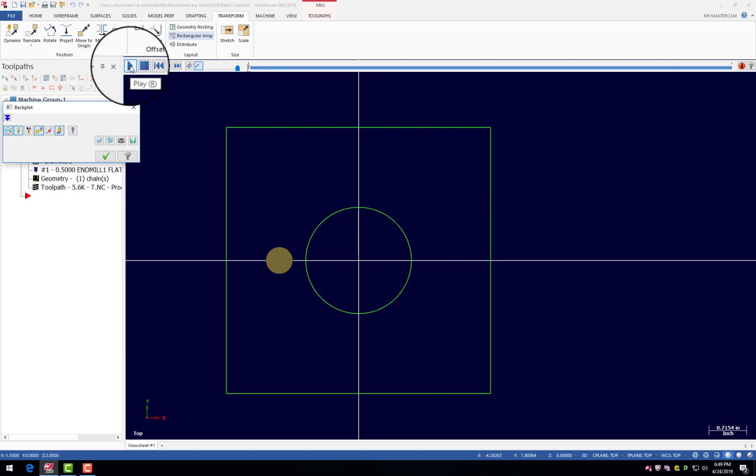Okay, so the focus of this video is going to be cutter comp options in Mastercam. All right, basically what I have programmed here, if we go to backplot and watch this run, is a straight lead in and then go around a 2-inch diameter circle, which will give us a 1-inch radius, which is nice and easy to see the cutter comp moves and what the software is kicking out for code.

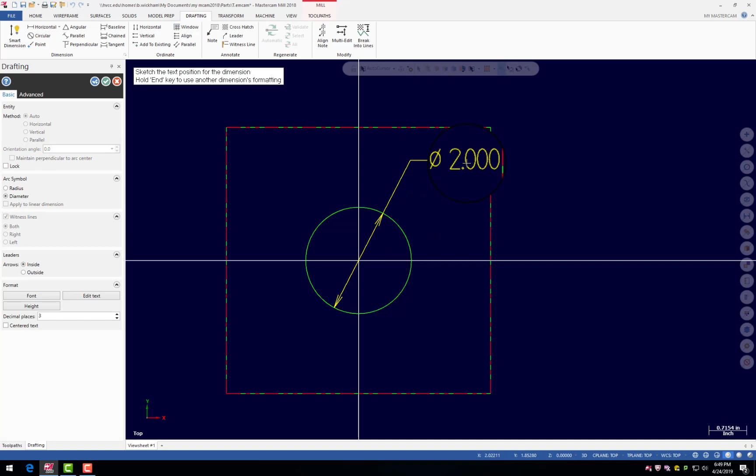Okay, so again, 2-inch diameter circle. I can go up in here into drafting and put this on there just for your reference. Okay, I have a simple contour, and again, we will watch that run again just to show you. Lead in, cut around, lead out. All right. This is not particularly an efficient tool path. I didn't change any speeds and feeds or anything like that. It's just a 1/2-inch cutter. The main goal of this is to show just the cutter comp options.

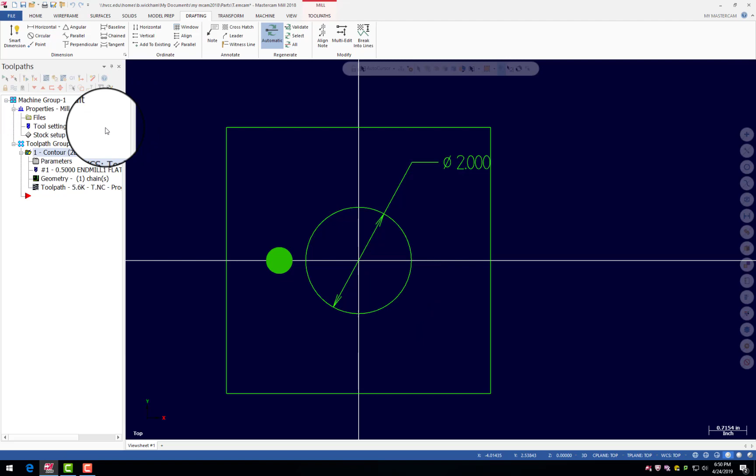Okay, we're going to select contour. In parameters, you will see under cut parameters the compensation type that I mentioned. This checkbox is very powerful. It changes your code somewhat drastically. All right, we will take a look at the different options: computer, control, and wear. We will also look at off. I will skip reverse wear for now because I find it not very useful. I have not used it a lot. All right, have not really had a reason to, so we'll focus on these 4 and skip reverse wear.

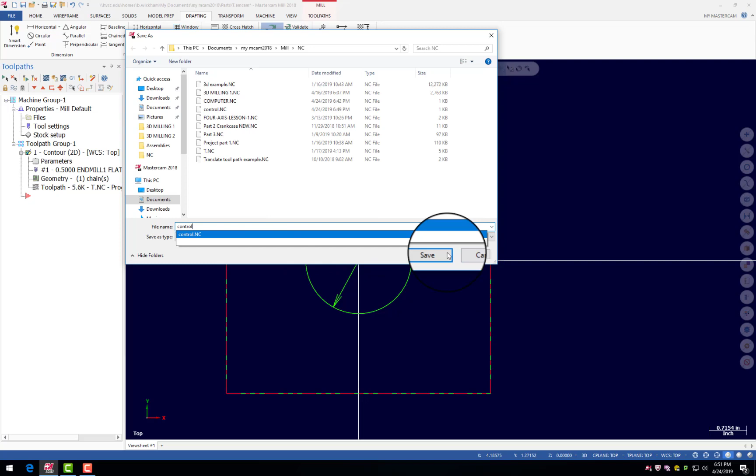Let's go to control first. We'll hit green check, and we will post this code. I'm going to label it as control and overwrite the existing example. And we'll take a look at what the code actually looks like. And I will save each one of these and show you at the end. Again, every one of these programs is going to be the same for Mastercam. The only thing I'm changing is the compensation type, and we are looking at the resulting code.

Okay, so we take a look. Check tool 1, work offset's the same. All right, look at line 170. And this is a big one. Okay, cutter comp to the left because we are going clockwise around the circle. D1 going to X minus 1.0. So there's the 1-inch radius. Okay, lead in with the modal command here. Clockwise all the way around. Look at your X, Y, I, and J's. See a bunch of 1 inches.

Cutter comp cancel when you lead off. Okay, Mastercam tends to do it efficiently, but if you are hand programming, it's very good practice, especially when learning, to lead on and lead off the same amount. Okay, so take a look.

This is control. What control needs from you is the diameter of the end mill in the controller, hence the control method. Okay, this program, if you do not put the diameter in the controller in the D1 area in your tool offsets, you're going to cut the radius of the tool on both sides undersize. Okay, because it's not compensating for the radius of the cutter. Hence, the control method. It requires a control input.

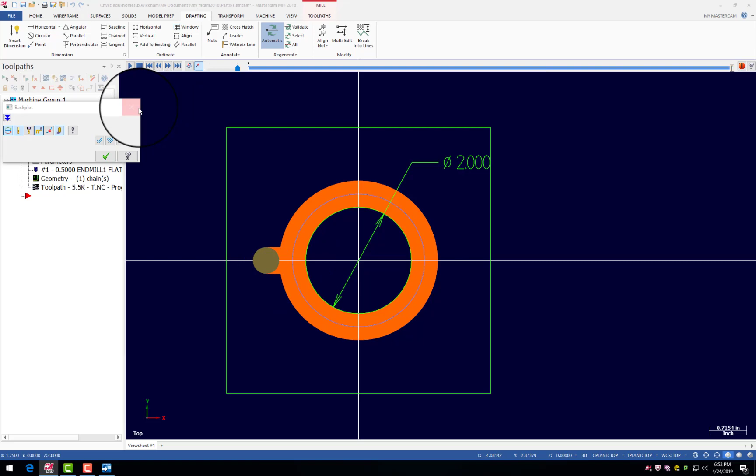Okay, let's minimize the screen. I will leave control.nc open so we can compare later in this video. Let's go back to parameters. Let's change to computer. Green check. Regenerate the operation. Let's look at it in backplot. Not much of a difference. Maybe a little bit more lead in, but nothing major. Okay, it's the same program. As far as Mastercam is concerned, the only thing I changed was the compensation type.

Now I will post this. I will save it as computer. And we will take a look at computer. Notice, okay, it is offsetting the radius of the cutter. Everything is increased by 1/4 of an inch.

Okay, so using computer, all of the cutter comp is not done with G41 or G42, and it has nothing to do with the actual controller. All of your tool offsetting is done in code. Hence, going to X minus 1 1/4, which since this is 1 inch, it's going right here numerically. Okay, there's no cutter comp in terms of G41 or G42. The compensation is done numerically. Hence, computer does all the work.

Pros and cons here. It's good if you don't want your operators to have controller offsets. Okay. The problem is you really can't edit much at the machine. Right? You have to go back to the software.

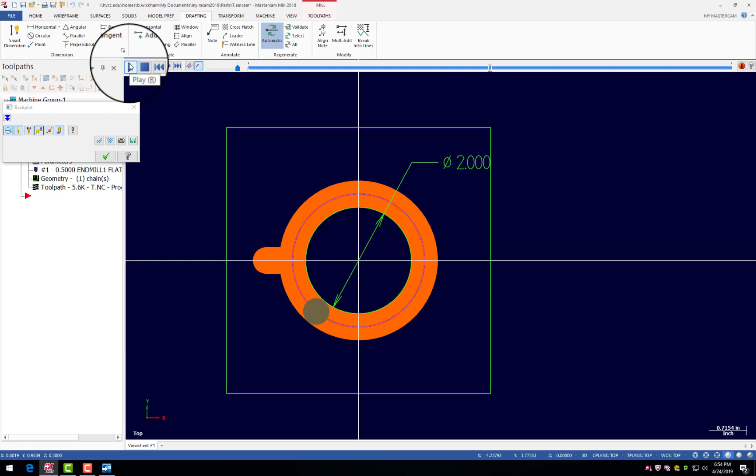Let's go back to parameters and let's go to wear. Select green check. Regenerate the op. Take a look and I'll show you. It is almost identical. I don't see any changes. Well, it is identical, not almost. All right, let's post it. We're going to post this and save it as wear.

Wear is now open. Now take a look at what wear kicks out. Wear kicks out the G41 D1 just like the control method, but it also numerically offsets the cutter like the computer method. So you can think of wear as a combination of control and computer. On most controllers, there is a column for the actual tool diameter in your tool offsets as well as a wear option, hence the wear method.

What this allows you to do is compensate for, let's say, a resharpened end mill or comping the part into size with the G41 D1 option to look in the controller for your size changes, but it does not require any large diameters in the controller. This is good in a lot of instances where you want the operator or yourself to have some variables as far as comping, getting the part into spec, maybe some resharps to an extent, but they don't want them changing large sizes or changing tools too drastically.

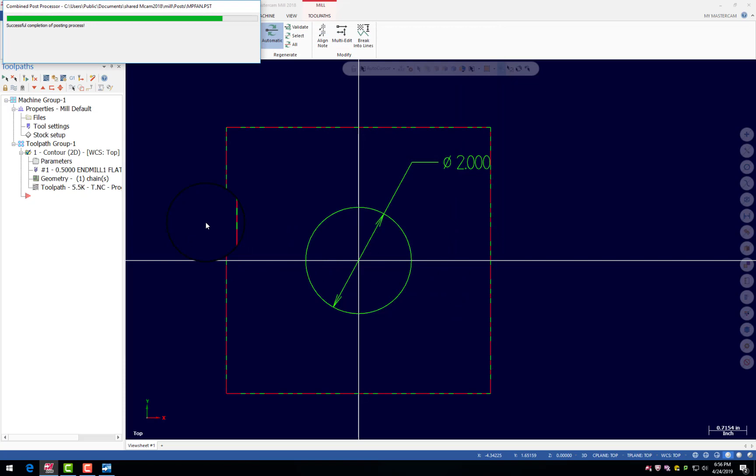I tended to use the wear option often. I find it to be a happy medium between the two, but I am usually between wear and control. Okay, so before we compare all three, I will go back to Mastercam, and I will go to parameters. I will select off, green check, regenerate the operation, post it again, name it off. Okay, and hopefully it's in here, off.nc, here it is. Notice there is, as you can imagine, no cutter compensation at all.

People ask, why would you need this? Well, one big reason I use this is if I'm doing single point engraving. The contour toolpath is very useful for single point engraving with, let's say, a 60 degree or included 45 degree cutter. I find it very useful for that, but I have not used the off cutter comp method for anything but engraving so far in my career.

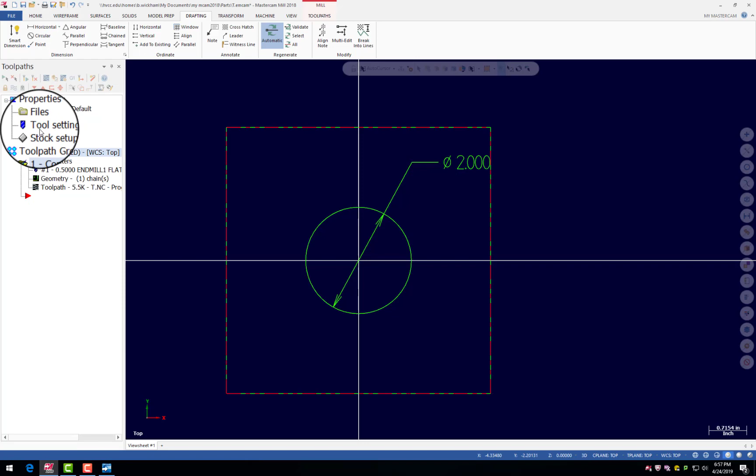So we'll go back. Again, Mastercam looks the same. The only variable we're changing is the compensation type, which in contour for our example is in cut parameters, top left right here. Let's go back to the code expert, and there's off, which has no comp; wear, which does offer the G41 cutter comp code with a D1 offset, which allows you to type in the wear column of the machine, and it is also offsetting the radius of the cutter numerically. Computer offers no cutter compensation, so you cannot edit at the control easily, at least on the controllers that I run. But it does offset the tool.

Okay, so again, there's control, line 170; computer, line 170; wear, line 170; and off, line 170. I hope you found this useful. Cutter compensation is a very powerful tool. I constantly use it. Why wouldn't you use it?